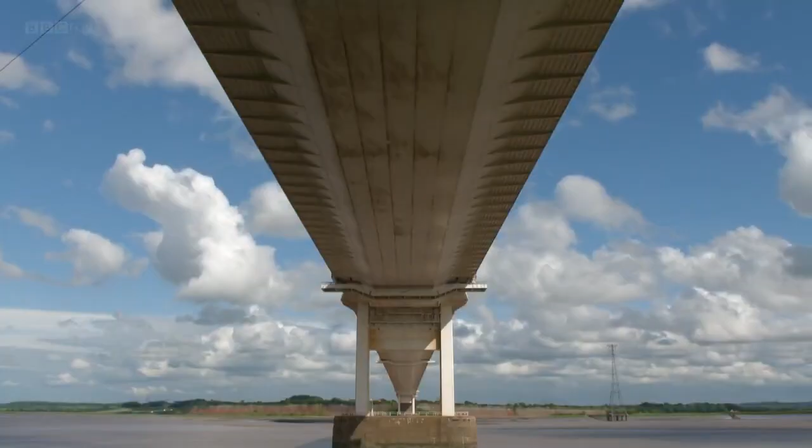The Severn Bridge is 50 years old, but its elegance is timeless, and its groundbreaking design continues to be flattered by imitation the world over. This, then, is the scene set for the royal opening of the Severn Bridge. It is with great pleasure that I now declare the Severn Bridge open.

The inauguration came 6 weeks after England had won the World Cup, and 6 months after the launch of colour television, a time of huge national optimism. What a day for a daydream. As Her Majesty comes, leading this great procession on to the Severn Bridge to make the first official crossing.

1966 was actually a pretty great year for British design, for British music, for British film, for British fashion, for British architecture, for British bridge design. Britain was on a roll. Bridges have this power to transform and excite a community and to make people really believe in the power of the future in a way, you know, that man's works can actually make life better.

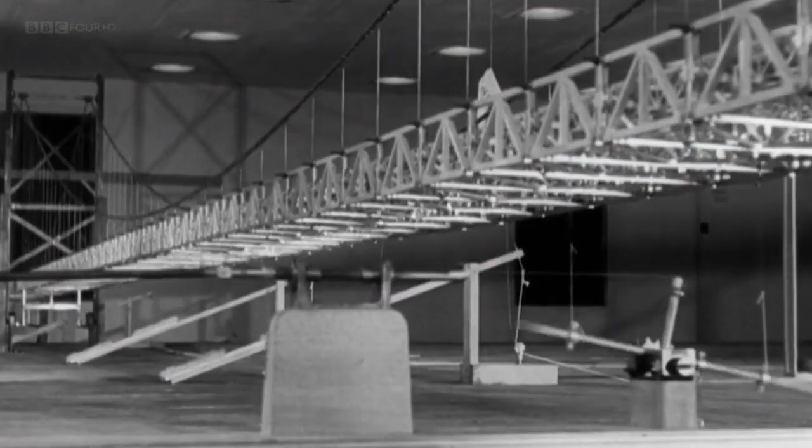This is the story of the Severn Bridge, told by those who designed it. Severn Bridge is the most perfect example of a suspension bridge in the world. It remains the leader of that sort of innovation. Nobody has found a way of doing it better. And those who built it. The workforce on that bridge, they were a breed of men on their own. The older I get, I'm very, very proud of the job and everything that went into the bridge.

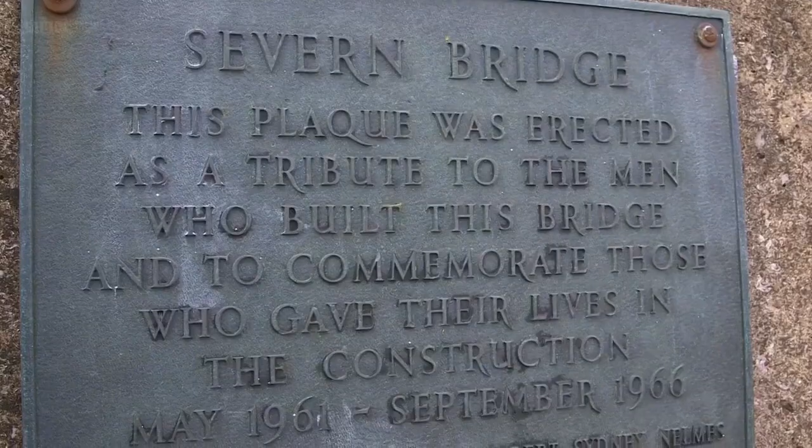But it's also the story of the men who lost their lives in the conquest of Britain's mightiest river. I always think of it as my father's bridge.

For many of its 200 miles, the River Severn shadows the border between England and Wales. But in its lower reaches, it presents a formidable barrier between the two countries, isolating the industrial powerhouse of South Wales. Once, if you wanted to drive between Cardiff and Bristol, you faced a 100-mile journey through Gloucester and Chepstow, their narrow roads increasingly overwhelmed by traffic. Or you could take a small ferry, but it ran only in daytime for a handful of cars.

The road links into South Wales from England were unbelievably awful. People cannot really envisage how it was. For instance, if you left South Wales and you went to the Beachley Aust ferry, which was the way to get over the estuary, and that ferry didn't always run because of the tide problems, and alongside the road down to the ferry were stakes in the ground which said half an hour, 1.5 hours, 2 hours. That's how long it would take you to get into the ferry.

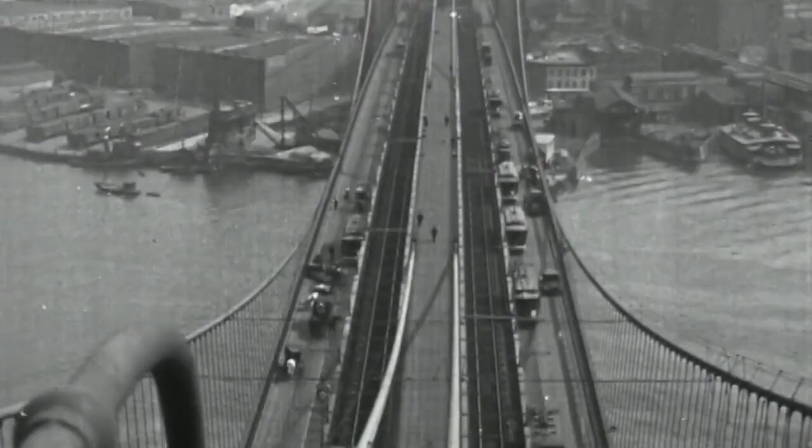I was born and brought up in Bristol, so from a very early age I used to go to the Clifton Suspension Bridge, which meant I was inspired with the whole idea of a bridge leaping from one side of a gorge to the other. The masters of long-span suspension bridges were the Americans, and they made them big. The Golden Gate and the bridges of New York were heavyweight structures with stone towers supporting iron and concrete roadways.

But when engineers tried to lighten the load, disaster struck. A terrifying example of the danger of vibration. The third longest suspension bridge in the world plunges to destruction at Tacoma in the United States.

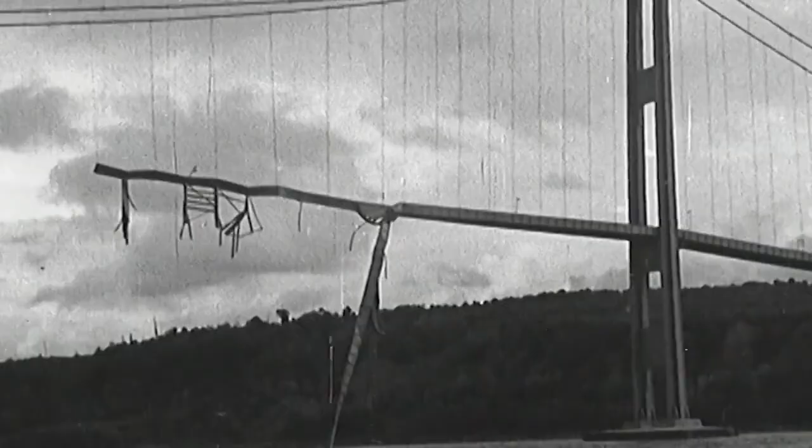This was quite a major bridge in the United States, and it was a radical departure from the conventional American design. But the fatal flaw with that design was that it had virtually no torsional stiffness. It was too flexible. It wobbled itself to death, basically, because there's inherent movement in structures. And the great trouble with suspension bridges is that the vibration set up by the wind can be like a sort of semi-perpetual state that increases and increases till the point where the bridge actually falls apart. These were big issues, but the Severn Bridge pioneered certain solutions to that.

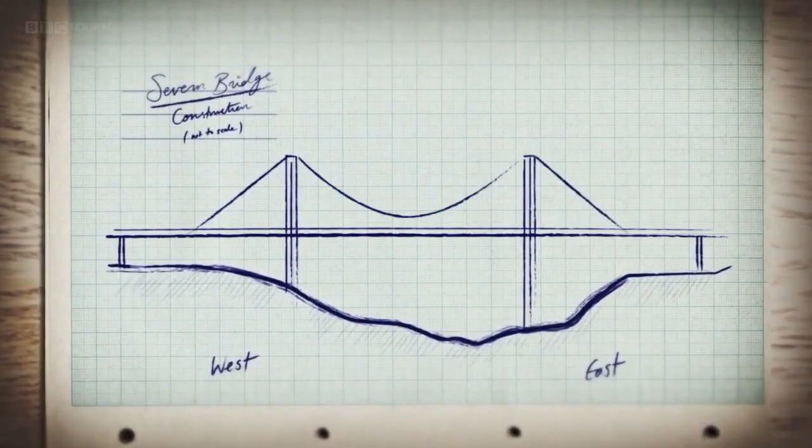Defying the wind was the greatest challenge, and ultimately the bridge's greatest claim to fame. A unique road design would hang from suspension cables draped over 450-foot steel towers. But before all that, the foundations had to be laid in a river infamous for the second highest tide in the world.

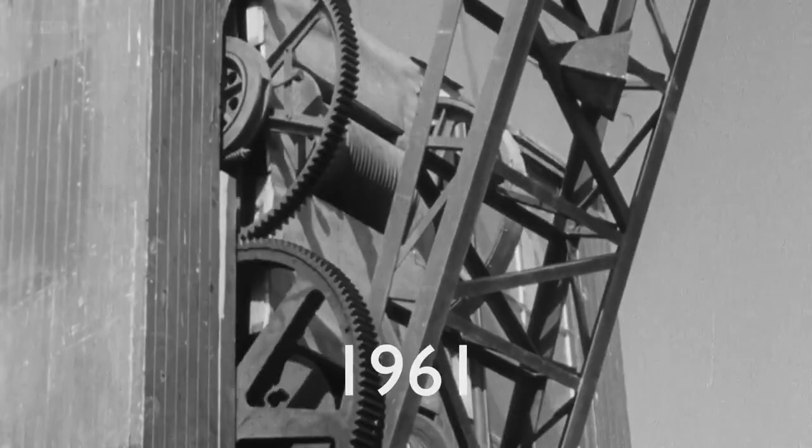Sir John, will you be faced with any particular difficulties bridging the Severn at this point? We will have to cope, of course, with an extremely high range of tide between high and low water, as much as 40 feet in this case. So we will be able to get to Wales in comfort by about 1965? So, yes. Thank you very much, Sir John. I'm talking to you from the middle of the M4, the London to South Wales motorway. Or at least it will be the middle of the M4 in 1966.

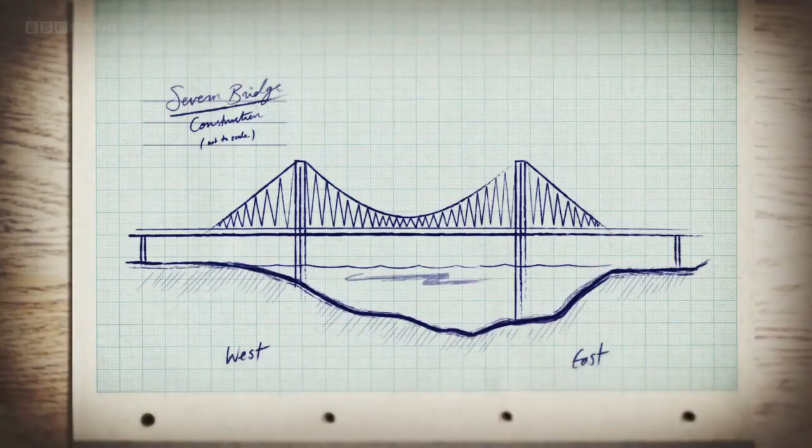The BBC reporter Tom Salmon documented the entire construction, beginning in May 1961. This, in fact, is the long-awaited Severn Bridge, the bridge they've been talking about building now for 100 years. The first 2 years would be all about the foundations. On either side, enormous anchorages would counter the weight of the bridge, and in the river itself, 2 bases would support the towers. The huge tides made this the most dangerous part of the entire project, especially for the foundation of the East Tower.

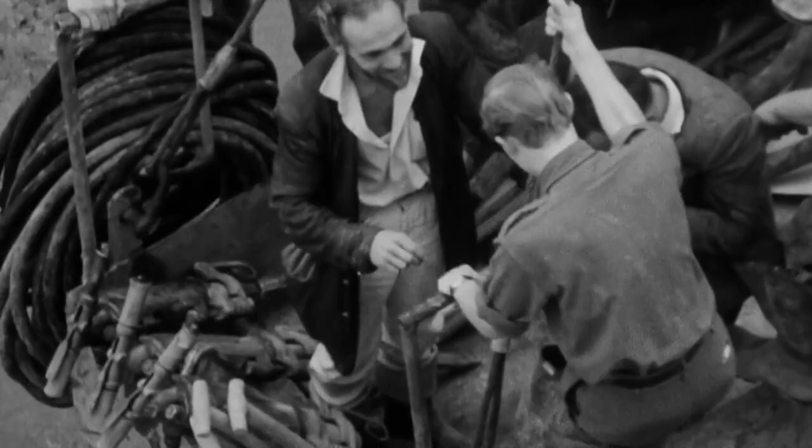I've heard a lot since I've been out here about tidal working. What in fact does tidal working mean? The tide goes out and the men go down on the blocks. The tide comes back, the men have to get off the blocks and wait for the next time. It's a dog rough job and there's not many men can stick it.

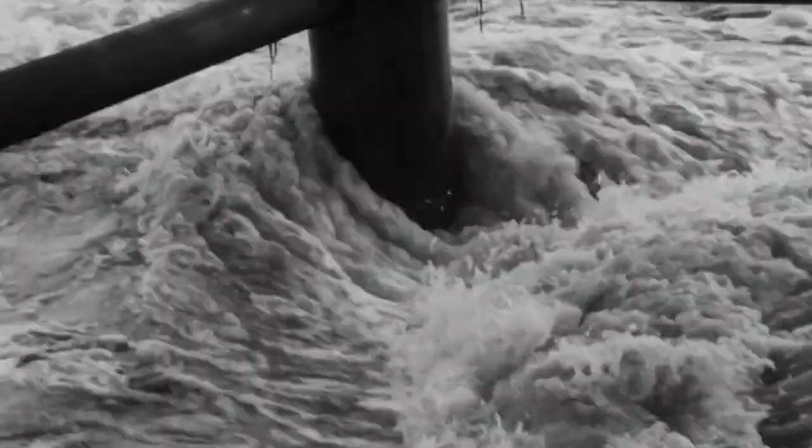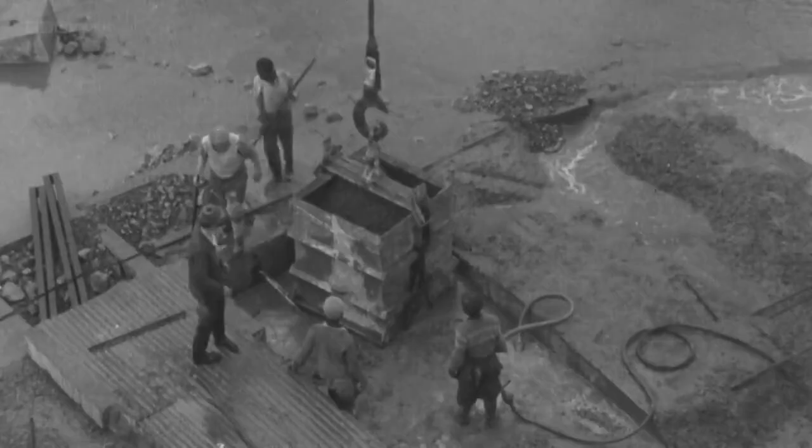This is a picture of me with our caisson sinking foreman. I had hair then. I'm John Evans. I was the most junior site engineer of the Severn Bridge. We were working in a regime where at an appointed time of day there was 40 plus feet of water. 6.5 hours later you were on exposed rock. 6.5 hours later there was another 40 feet of water. So working in this river with this huge rise and fall was a major civil engineering challenge.

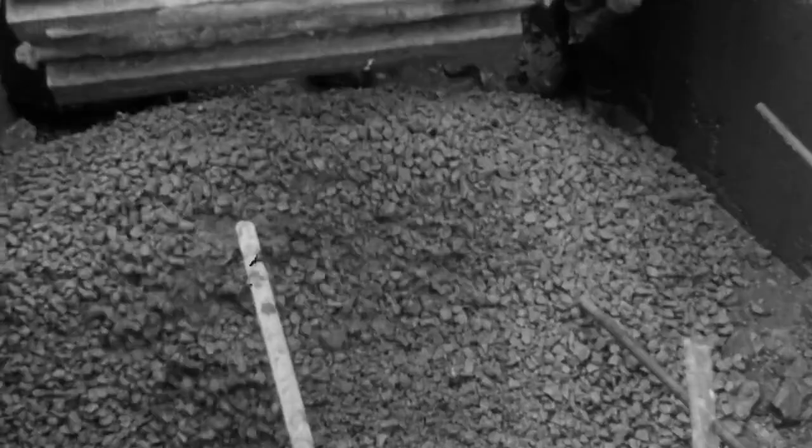The rock was probably exposed for a maximum of 2 hours at low water springs. So you could take a very small area, clean it off, and put a bit of concrete down. And then you come back 12 hours later and do another bit. And some of the lower parts of the rock were literally only exposed for about half an hour at low springs. I thought the men were brave because of the intimidation of that water coming in. I did feel, yes, a deep admiration for the foundation contractors.

Because of the tides, safety launches were on permanent standby throughout the construction. Their first one was skippered by a local fisherman, Jack Hollins. I think it's a family thing.

My father was in the shipyard. My Uncle Jack was a fisherman. He used to go out and fish for salmon. He worked on the ferry.

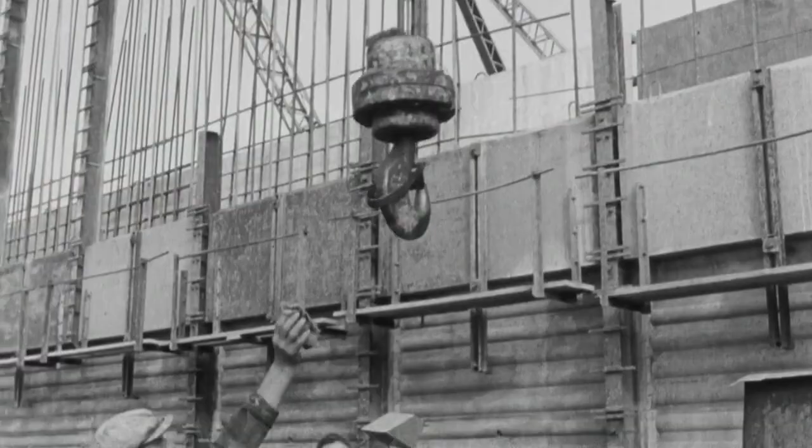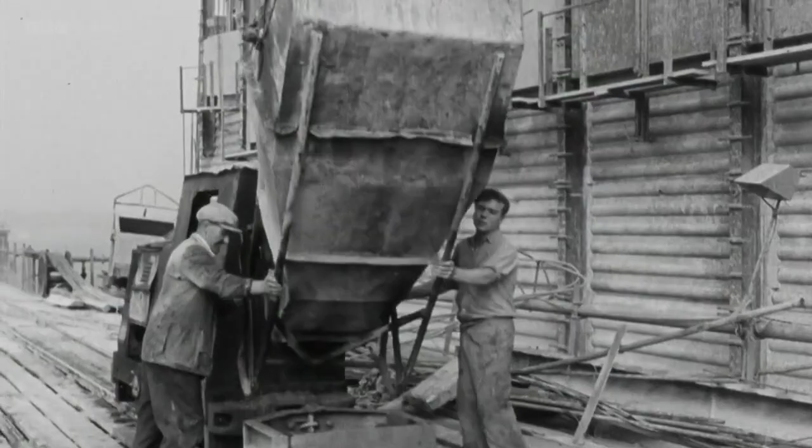This is the eastern anchorage, and this will take the whole weight of the Severn Bridge. And next time you complain about having to lay a concrete path in the garden, well, just you think of this little lot. It's 140 feet long, 110 feet wide, and 120 foot high. And into it, when it's finished, 90,000 tons of concrete, and 90,000 tons means that it'll weigh more than the Queen Mary. The concrete consumed vast quantities of stone, pushing nearby quarries to the limit.

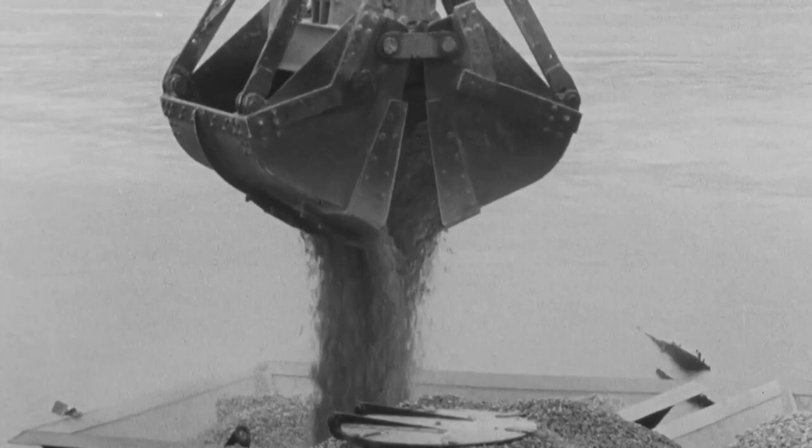The area's hotels were stretched to accommodate hundreds of workers coming in from across the country. But local people knew it would all help to relieve their biggest problem. Before the bridge, Chepstow was a real blockage. There was queues and queues and queues of people. They couldn't get through. Huge lorries, they would shake the house. Boom, boom. And we've even been reduced in very warm weather to go and take drinks outside. The lorry drivers. Take you home with me.

Get my house. There used to be queues every bloody day. Some days it'd take us about half a day to get to work. With traffic and Chepstow. Crashing, lorries crashing into shops and whatever. And it was a bottleneck. The famous arch in Chepstow used to be one big congestion. And when people drive into Chepstow, there's only one object at the moment, and that is to drive out of it if they can. I think once the bulk of the thundering lorries are out of the town, people will want to come to Chepstow.

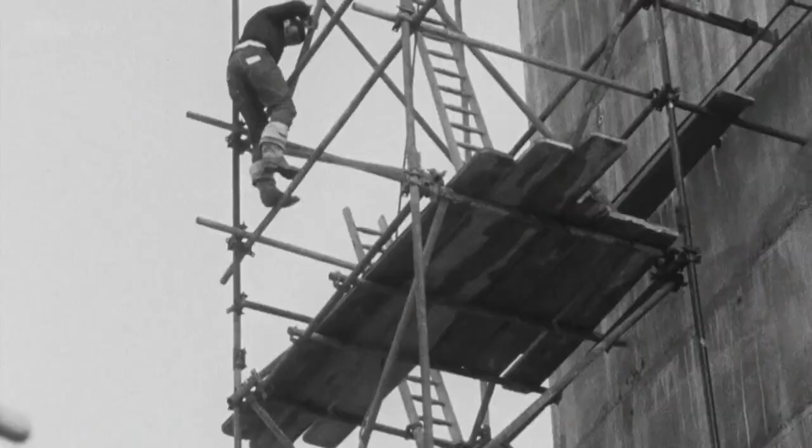Personally, I'd rather come down in the bucket. Well, so much then for the anchorage. 90,000 tons of it, 45,000 tons still to go. There's another one just like it on the other side of the river, and they tell me there's quite a bit of rivalry between the two.

We had to establish where the west anchorage was going to be. That was in the middle of the Army Apprentice College first rugby pitch. And one of the early jobs was to take up the turf and get rid of that. Lots of new lawns in Chepstow.

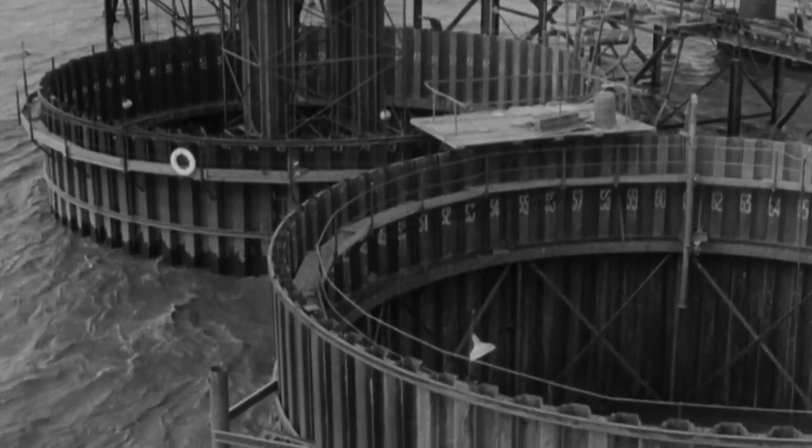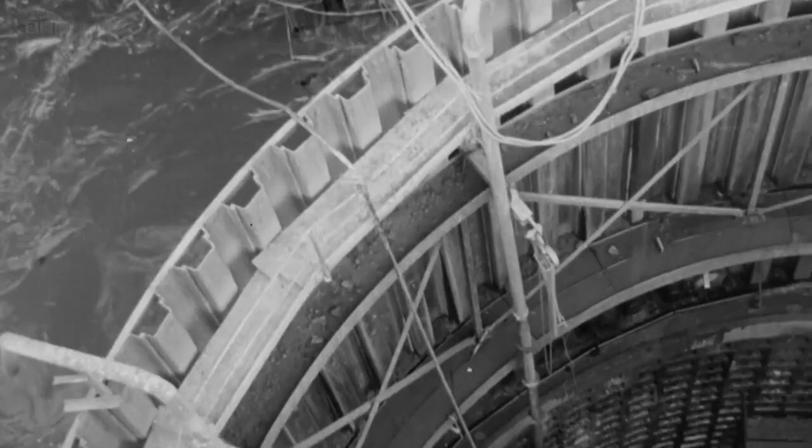Attention now switched to the base of the West Tower and a new problem. Here, there was no bedrock on the surface, so to gain a solid footing, they had to dig 30 feet below the river, and that meant installing temporary dams to stem the tide. The cofferdams themselves were in effect a vertical cylinder, 40 feet high, 60 feet wide, and they were formed of sheet piling. You see it on dock walls and places like that.

My name is Graham Nash. I arrived on the site of the Severn Bridge to supervise the construction as a junior engineer.

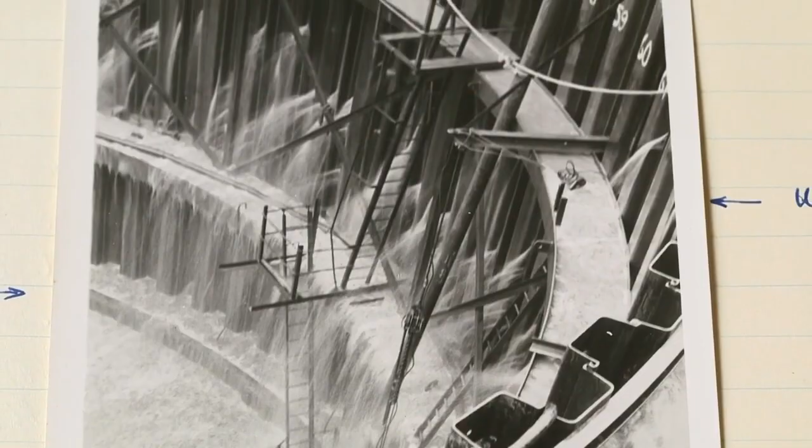This shows the water coming in through the joints. The cofferdam would only leak until eventually the tide dropped, and then it would leak the other way. The conventional method for sealing these leaking joints was to pour ashes down the outside, and it was quite fascinating the way in which the water jets just reduced away to nothing.

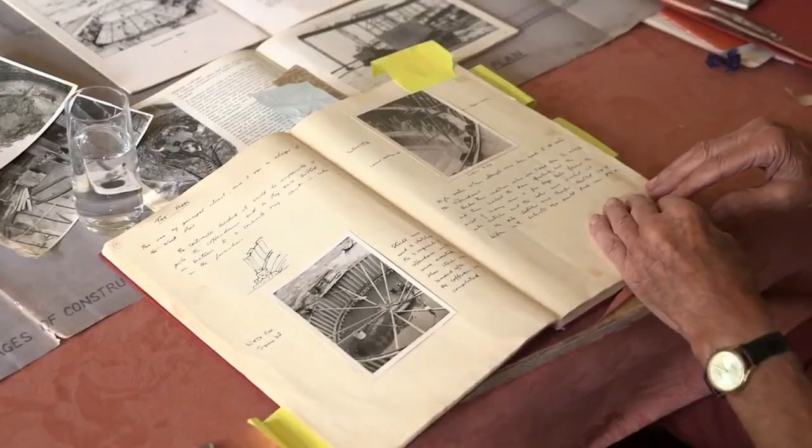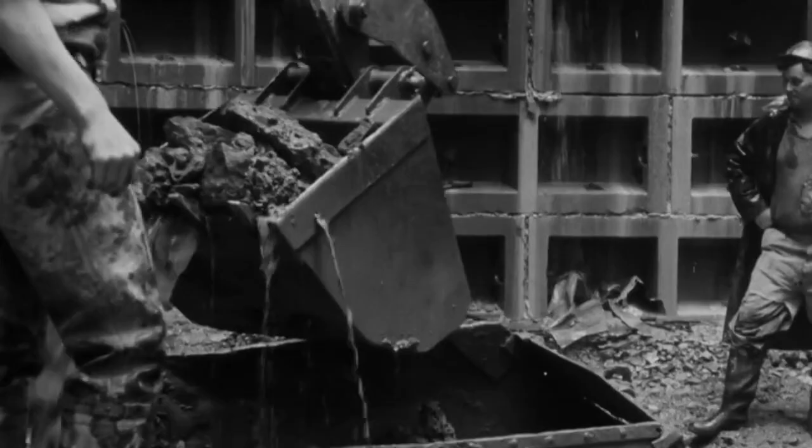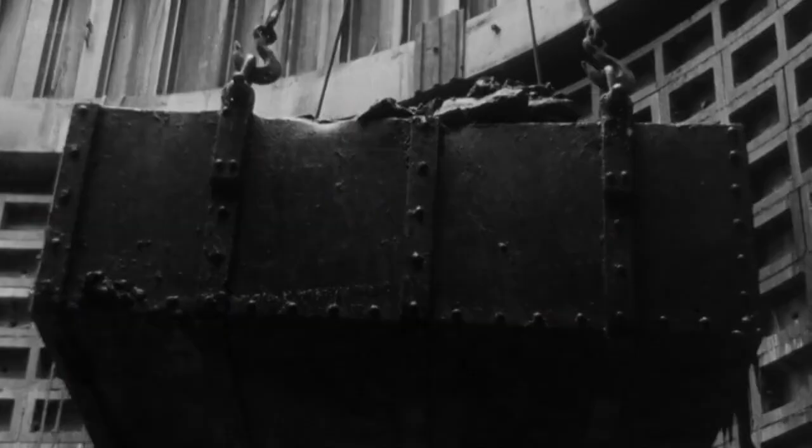So we had faith in the structure, and once you've got faith in the structure, you put on your wetsuit and your helmet and you go down there. We were working something like 60 or 70 feet below the tide level outside. And as a ferry went past at high water, you could hear the thump, thump, thump of the engines and the screws. And sometimes if the ferries came a little bit too close, you'd get an extra drenching down below.

It was an exciting job too. I mean, make no mistake, we knew we were building something quite historical.

The weather was also making history in 1962. The first inkling we had that we were in for something exceptional came the weekend after Christmas. We had the coldest spell of weather I can remember. Salt water in the river, and it became full of ice floes. If you were down at water level on the bank, it looked as though there were enough there to enable you to walk across. That was quite remarkable.

Before the first snow had even looked like melting, in fact, while most of it was still lying where it had fallen, there came another and even greater blizzard. Again, it was the southwest that bore the brunt. Throughout this period, we continued working, and towards the end of February and into March, the local quarries had to give up. The temperatures were so low that the crusher jaws, which are cast iron material, were shattering in the cold. Motorists were advised to take no journeys whatsoever, not even essential ones. 1962 went out with the southern half of Britain littered with abandoned cars.

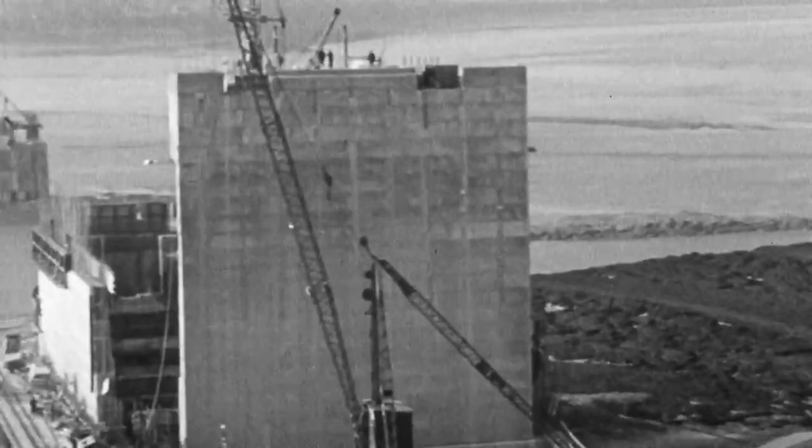Slowly, almost imperceptibly, the 6th biggest bridge in the world takes shape. Despite the setbacks, the foundations were completed on schedule. The anchorages on each side and the bases in the river ready for the towers. It was time for the concrete mixers to give way to the steel erectors.

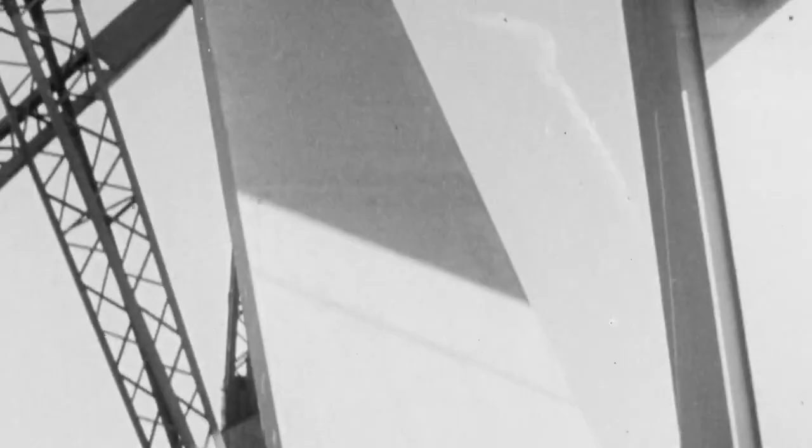It wasn't exactly exciting doing the foundations, really. It was interesting, but it seemed to be slow. You know, it took 2 years to get that pier constructed. But once we started to erect the towers, I think then it began to strike home that we were really going up. A lot of people think that the towers of the bridge are made of concrete, but in fact they consist of steel boxes bolted one on top of the other.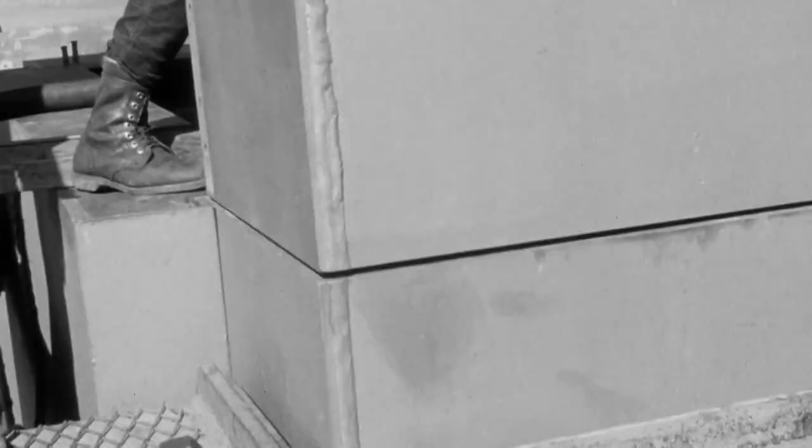When you build a suspension bridge, because of the curvature of the earth, if each tower is vertical, they're actually not parallel to one another because of the centre of the earth down here. And believe it or not, that is allowed for. If you want to get an idea of the precision of the job, just consider. When the towers were completed, they were strained outwards exactly 32 inches. When the centre span is completed, they will lean inwards exactly 8 inches. And when the side spans are added, the towers end up vertical. Isn't that miraculous?

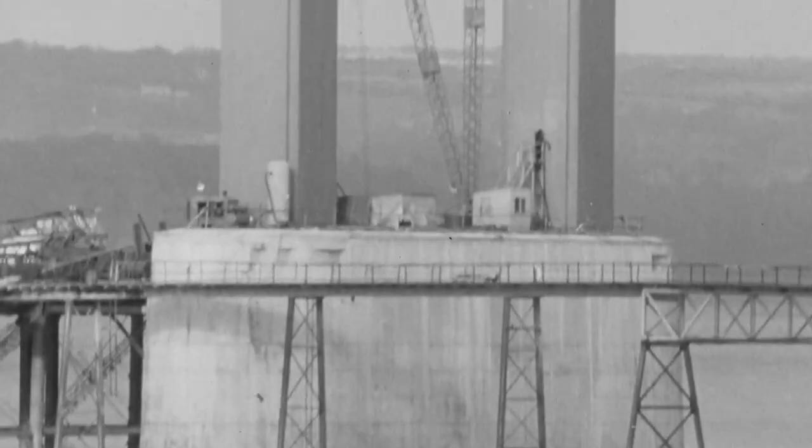And on they went. 2 towers, 1,200 tons each, erected in 8 months. The next thing they had to do was to join the towers together. They had to get a piece of wire across 3,000 feet of water. Well, this they did quite simply by loading a huge reel of wire onto a barge and driving it across and paying out the wire as they went and letting it rest on the river bed.

The demand for wire was insatiable, the length almost enough to encircle the planet. I'm Howard Peterson, and I left my father's farm and went to work in the winding shed. I've never seen anything like it before. The machinery and the coils are starting to come in, and what the devil do I do with this lot? They would come in on lorry loads.

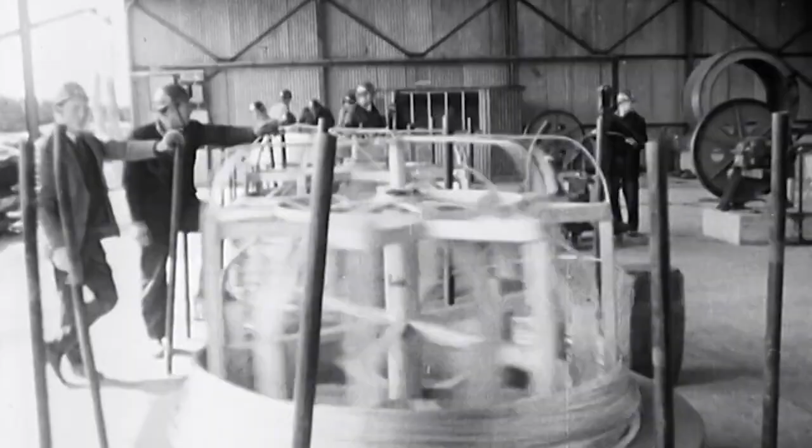You cut the bands on these coils and it could fly anywhere if you don't have it under control, and then reel it onto the main drum, which was like a giant cotton reel. The big drum was offloaded and taken away ready for spinning across the bridge.

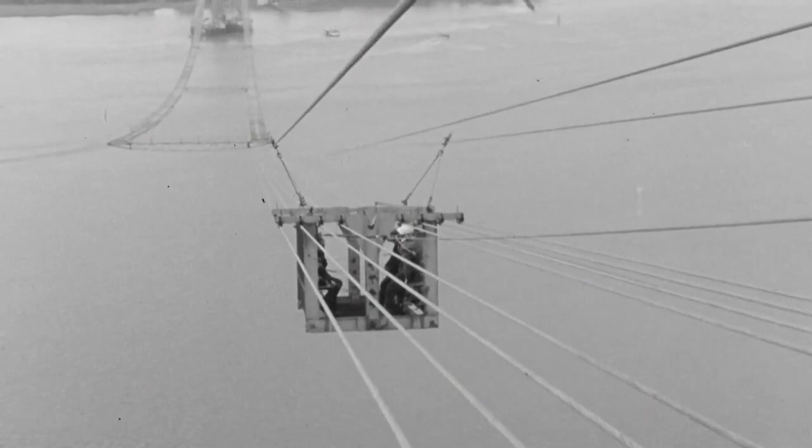And the foreman came to me one day and said, "I've got another job for you. I want you to go and be labourer to the carpenter." I just don't know what to do with myself. That was the first time I'd been up the tower. They then put square pieces of steel mesh to make footwalks from one side to the other.

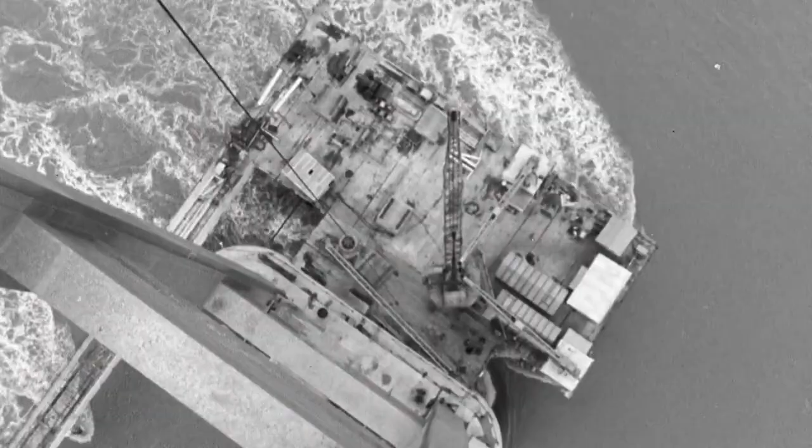To look around and see for miles, and then you think, God, I'm about 450 foot up. Never been up this high before, you know. And I looked over the side then, and had a look down and see the safety launch below. And it was like dots down below. It was unbelievable. So you go to the handrail.

One time the handrail wasn't there. It would have been open. Men were working on the top of this structure, and they had to work right on the edge of the structure to put the handrails around. You can't envisage being in that situation.

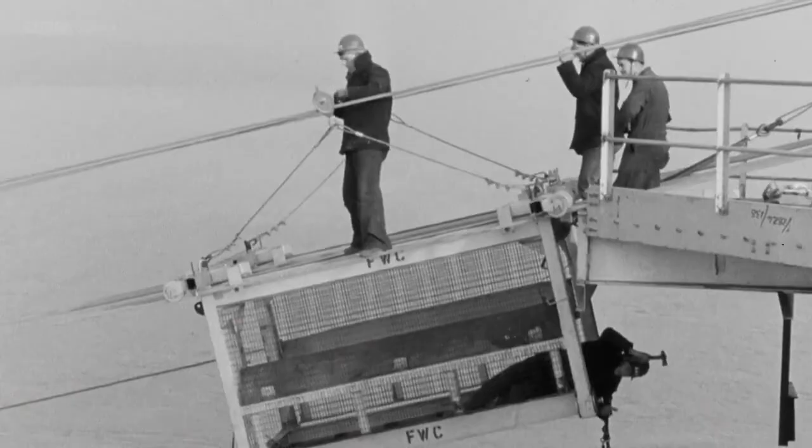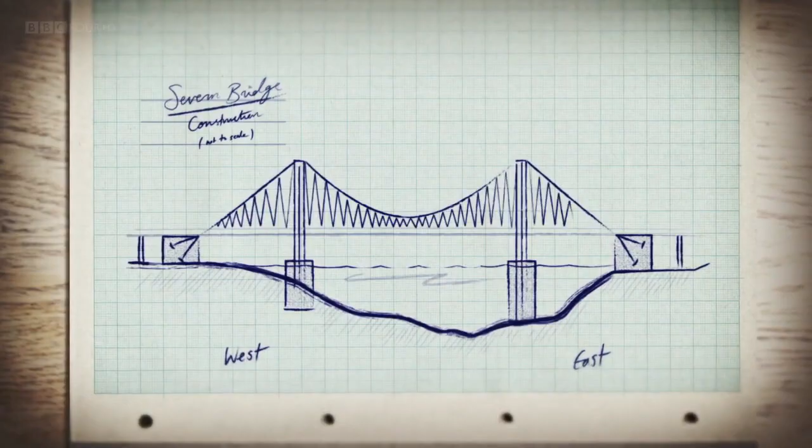The first wires were there simply to support the catwalks, but now it was time for the main cables from which the road deck would hang, and they were a different matter altogether. And I think this is just about the finest argument I've ever heard for giving up smoking.

And this is one of the main cables of the bridge, looking rather more substantial up here than it does from down below. And this, I suppose, to the layman is just about the most baffling bit there is of bridge building. How do they get a cable as massive as this one across the river?

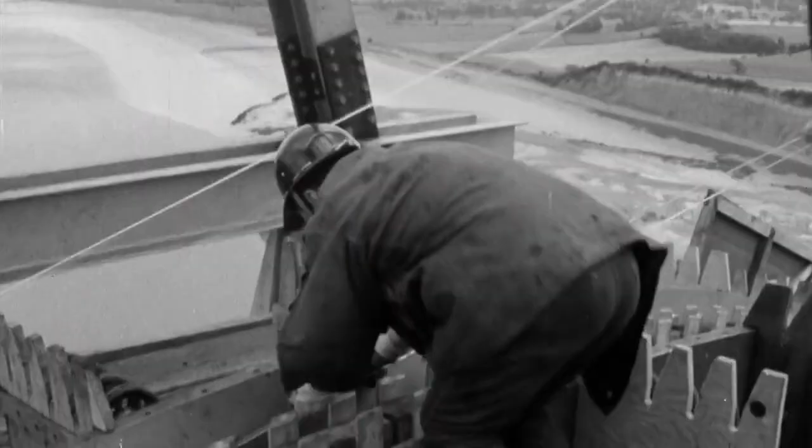Okay, now. It's a process whereby you pull a loop of this up over the towers, across the main span, up over the other tower, and down to the far anchorage. And then the carrying device comes back with a loop of wire again, and it goes back and forth, back and forth.

Cable spinning, as it was known, was relentless. 16 hours a day for 6 months until 18,000 miles of wire had been spun across the river. All right, Rob, settle it up. And for the whole 6 months, only strong winds gave the steel erectors any respite. Food and drink was brought to them on the catwalks as the spinning went on.

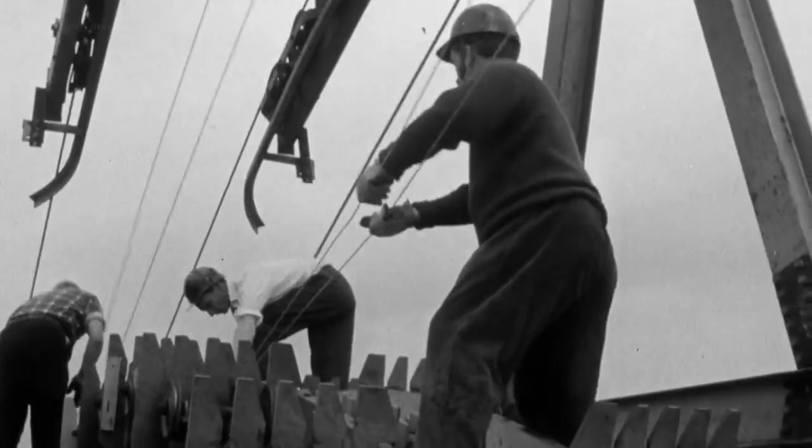I'm Brian Hughes, and I worked on the Severn Bridge, supplying the men that were spinning the cable with tea and soup. My job actually was delivering the tea down to the men on the catwalk. It takes about half hour to walk down there and back, with the tea on the back of it. But it was all right.

God. Everything a steel erector wanted, he had to have. And when the steel erector was unhappy, he'd be for the high jump. Our tea room was bolted to the side of the tower, and you'd enter through the roof, go down the ladders, just like you went into a submarine.

And the towers was moving easy, a good 4-8 foot from side to side. When you were in that canteen down the side of the tower, you put a cup on the end of the table, it moved from one side back to the other. Even a full cup of tea, man. When the weather was bad and the guys had to come in, I suppose they wore out more packs of cards than any other industry I know.

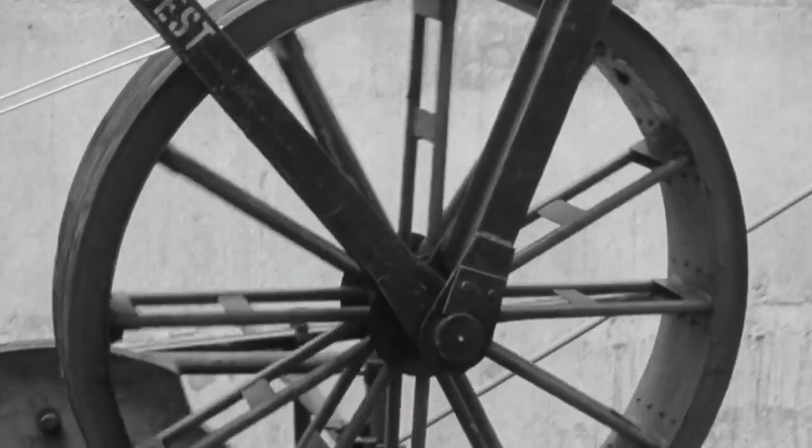The sound of the pulleys pulling the wires across was very distinctive. It was a sort of tinkling, clanking noise, and you could hear this going on from early in the morning until late in the evening.

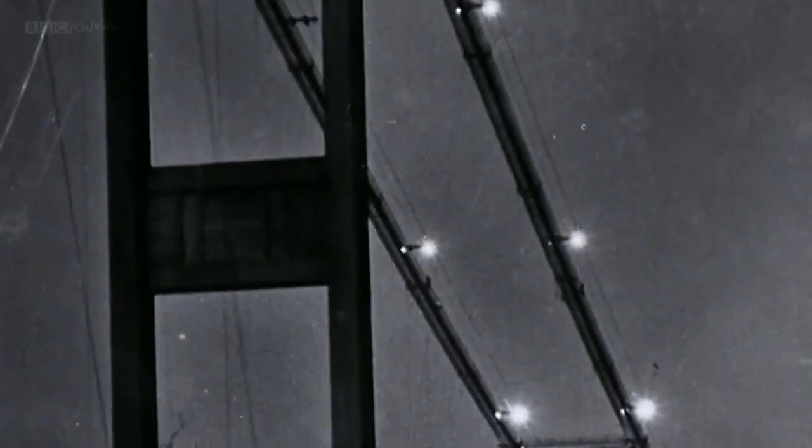Spinning continued day and night through the summer of 1964. It became a way of life. The team were very keen on skittles, and we became interested in the possibility of competing with some teams from Chepstow. Once or twice we drove round the top and down to Chepstow, and that meant a very late return home at the end of the evening.

And then someone said, well, why don't we walk across? The lights are always on, they're always safe. And so we used to walk across and have our skittles and then have a beer and walk back again. It was a very good way of spending an evening.

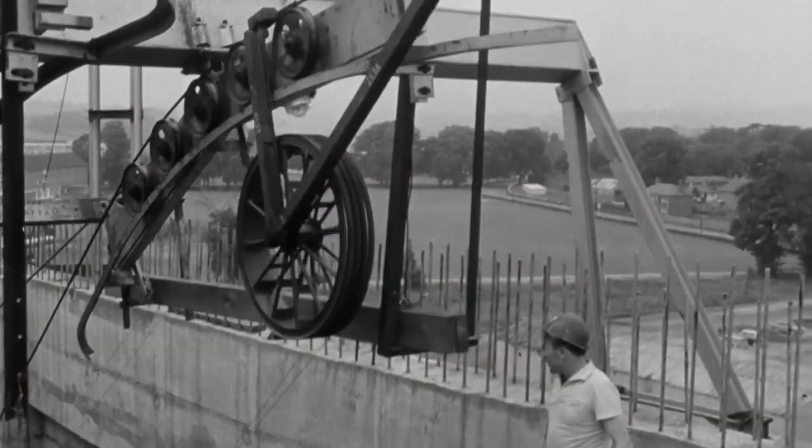On the deck, on the top of the towers, there was a portable loos. We had a guy there that looked after the loos. And he stunk that much, we wouldn't let him in our tea hut, so we used to bolt the hatch down. And I don't know what possessed the man. He came to empty the toilets and threw the bucket of waste over the side and didn't even look to see where it was going to land.

And unfortunately, the safety launch. Beautiful day, sun was shining, and we heard a splitter splatter which sounded like heavy rain. I went out of the wheelhouse and found that somebody had tipped the contents of the chemical toilet, and most of it had landed on us. The gaffer came rearing in to the tea hut and gave us boys a real dressing down about throwing the bucket waste over the side of the bridge.

I said, well, it wasn't us, you better go and examine what the contents are, and you could see it wasn't our fault. And one of the steel erectors slapped me on the shoulder and said, it must be your lucky day, what are you backing on the horses?

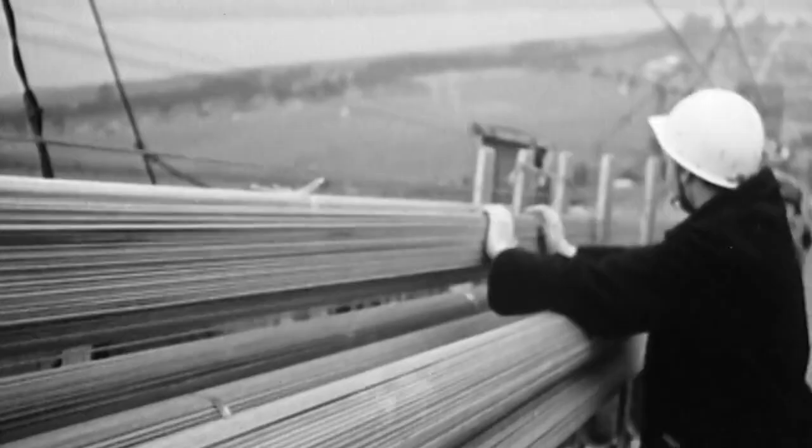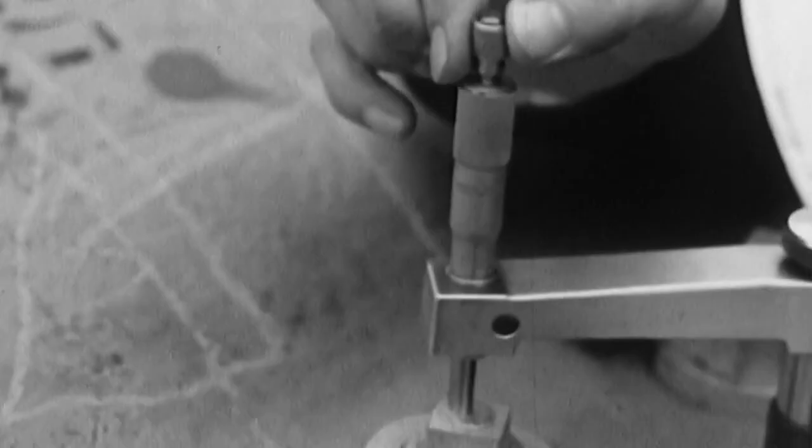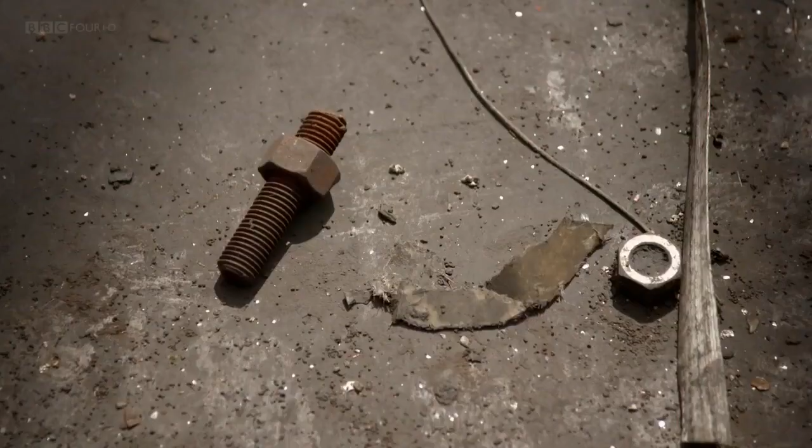Once all the wires are in position, they are compressed into a circle and clamped together at a controlled tension. Each cable is now ready to take a load of 10,000 tons, and the equation is almost complete. The final stage of construction was where the Severn Bridge achieved its greatest innovation. Today, the old shipyard in Chepstow shows little sign of its groundbreaking role in civil engineering history. But this was where they built the bridge's revolutionary roadway.

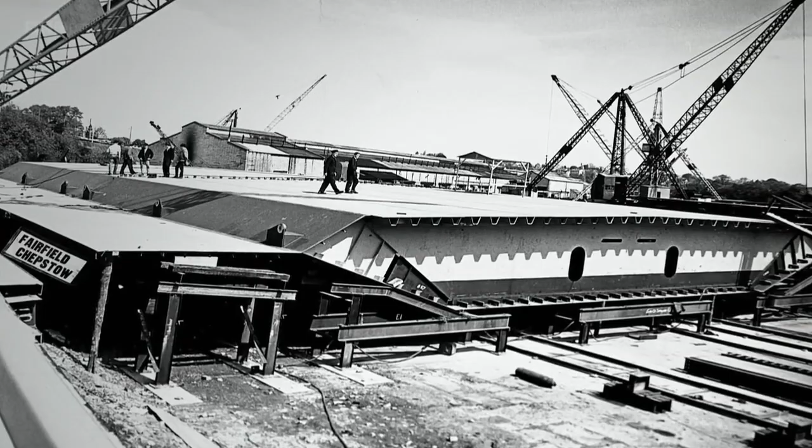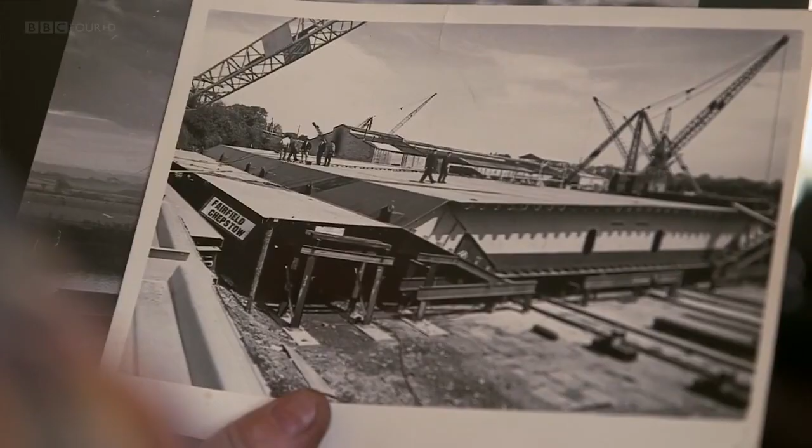This is the first time a box structure had been made of this shape or this size. It was built from stiffened plates, 1, 2, 3, 4, 5, and we all knew this was an innovation. And I think we all wanted to make a success of it. Well, I could describe it as a spaceship. The wind coming up the river, they were designed for it to go underneath and up and over. So it was an aeroplane shape, really.

But you know, I do believe I'm there. Looks like we're discussing whether it's time to go for lunch.

The plated box design was a response to the Tacoma disaster in 1940, but it took 20 years for the idea to gain favour. Those winds had sent shockwaves through the world of civil engineering. Fortunately, the only casualties were a car stalled on the bridge and a dog. As a result of the failure, we in this country decided that we would have to stick to the open truss, as in all previous American big bridges.

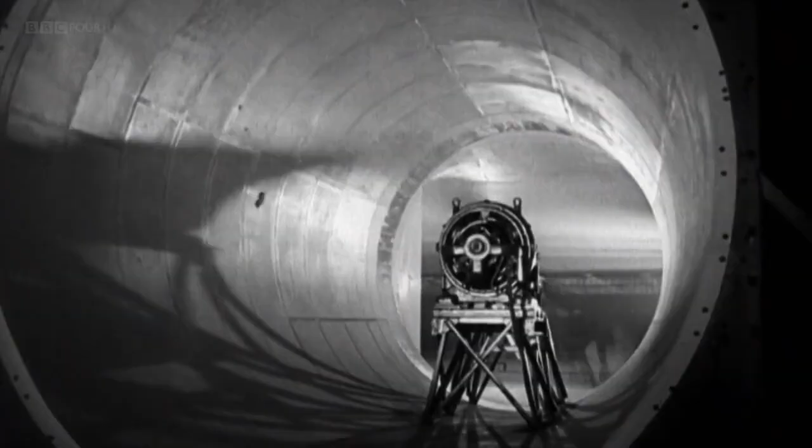The classic American truss deck comprised a heavyweight lattice of steel girders under a concrete roadway. And right up to the start of the Severn Bridge construction, this was the plan that was being fine-tuned in the wind tunnel. But the design team, led by a taciturn Welshman called Gilbert Roberts, already had the plated box in mind. They just hadn't had the time or opportunity to test it.

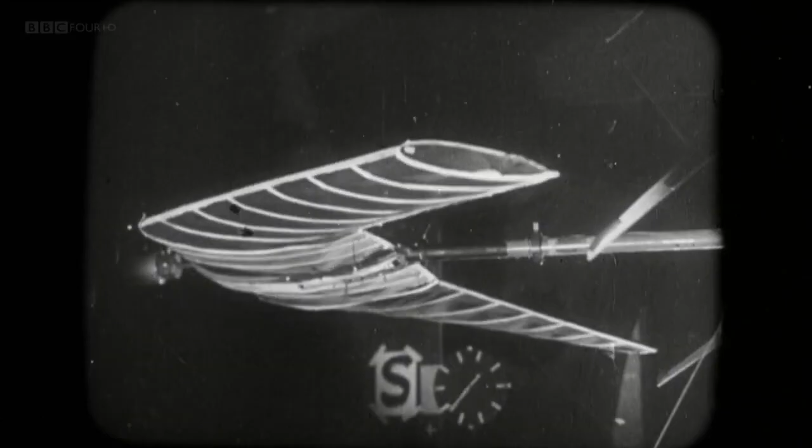A very good solution had been found to the problem of Tacoma Narrows by making it with open work trusses. As the wind stream meets the front girder, it divides and curls round the top and bottom edges of the girder. But this had the cost of considerably increasing the actual ordinary wind forces. And the way to get around that would be to make them much more like an aircraft wing. And Gilbert Roberts wanted to test the new aerofoil type there. But this was unprecedented, and wind tunnel testing time is scarce and expensive.

And then one day, Gilbert came over into the office and said the model that they were testing in the wind tunnel has broken loose from its anchorages and has smashed itself. The man responsible was seriously worried, thought that Roberts would be highly critical. I'm dreadfully sorry, Mr. Roberts, but we've just broken the model. And it wasn't in Roberts' nature to say, hooray! But that was his reaction, in fact.

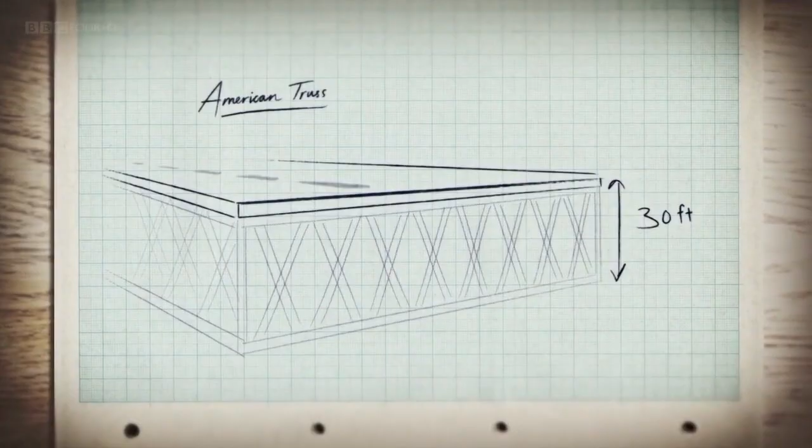So I said, well, the time has come, I think, sir. He was sir to me. I think the time has come, sir, that we've got to think about the possibility of using the plated box. So out went the heavyweight truss, and in came the plated box, a third of the depth and half the weight.

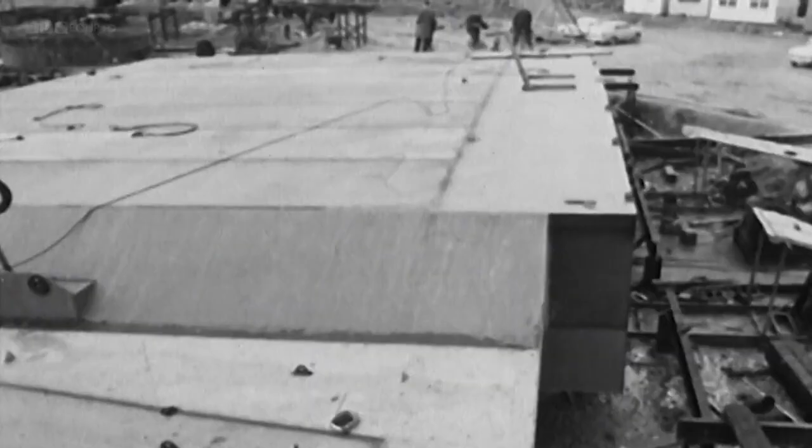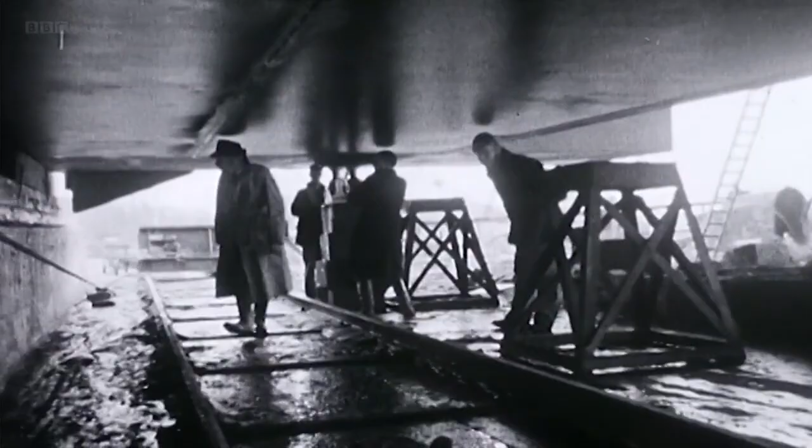It sailed through its tests and went quickly into construction. A stroke of genius with a touch of serendipity. It was streamlined, which meant that the wind forces were less. It used less steel, and therefore it weighed less. And therefore you reduced both the lateral forces and the vertical forces.

So there were savings on the cables, on the towers, and on the anchorages, because the tension of the cables was less. And if you add all those savings together, it is immense. One of the towers of one of the big American bridges contained more steel than the whole of the Severn Bridge.

And you know, I think when this was pointed out to the American engineers, they got a bit annoyed, really, and thought that we'd been cheated. The Americans might have envied another benefit of the boxes, that they could float and therefore be towed down to the bridge. The first of 88 that would span the Severn was launched in September 1964.

All the dignitaries were watching and all ready on the sides, and he had to give it a blow with a hammer, and the pin flew up, hit the hammer with his hand up in the air, caused quite a lot of amusement. But slowly the unit started up and slowly launched itself into the river. No problems, all perfect. Much to our delight and relief.

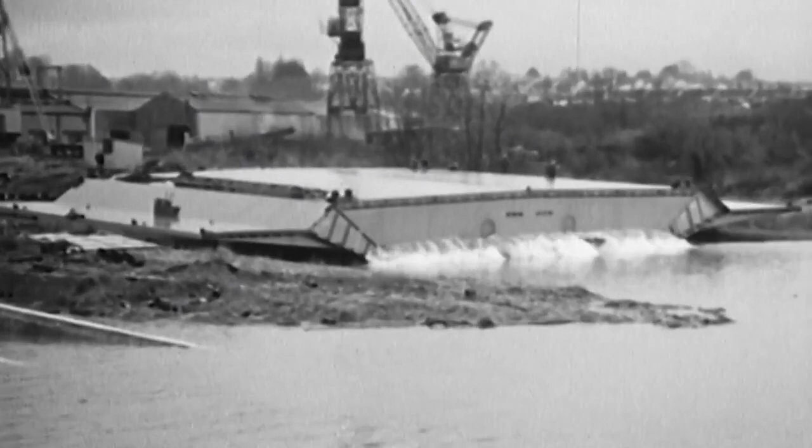Slender, streamlined, almost fragile-looking, their appearance conceals a strength and solidity which will allow winds of 100 miles per hour to blow harmlessly round them. The road sections of the bridge are made of steel. In fact, they really are just a series of steel boxes which have been made up in the steel yard at Chepstow and then launched into the River Wye down a slipway.

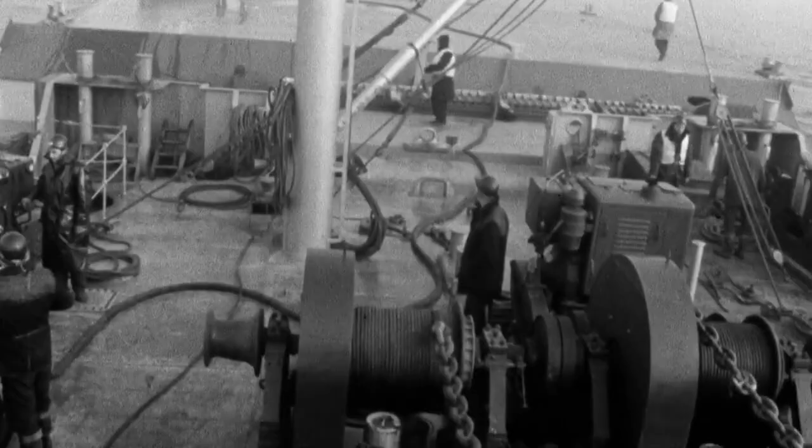A special barge was built to collect the boxes and take them to the bridge. Called the Severn Nave, it had no rudder and was steered by 4 outboard engines, one on each corner. My name's John Roberts. I was a deckhand on the Severn Nave in 1964. Just waiting for the sections to come into the water, and then we'd get hold of it and secure it. It was a very nice job to work on. We used to look at each other and say, they pay us for this.

The skipper of the Severn Nave was Jack Hollins, the man who'd survived the fatal accident on the first safety launch in 1961. Now his knowledge of the river would prove invaluable. Jack had always worked on the river. He was a fisherman, operated one of the stopping boats in the Wye. Very skillful. He was just always in control. He used to see things

before they happened. Jack was tall, dark and handsome, and he was always part of our lives as children. And we used to go and stand at the end of Raglan Way, and we could look down on the Wye River, and it was something to see. It was really like looking at a submarine, actually, a very large, wide submarine. The main part of the road decking, as they call it, is 80 feet wide, and there'll be 4 traffic lanes, 12 feet wide, 2 in each direction.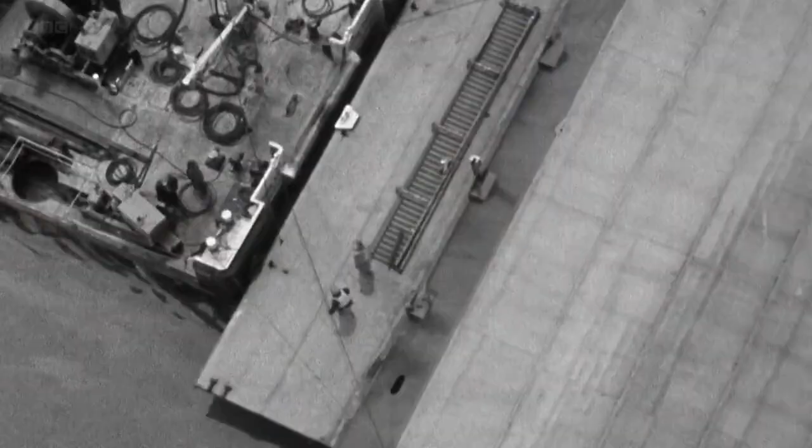So Jack had to manoeuvre this vessel into position underneath the lifting tackle, and it would have been a fairly tricky job to do. We get the sections, bring them out into the Severn, drop anchor 50 yards, 100 yards before the bridge, and then you let it out on the winch and just drop it down under the bridge. You've got to have good visibility. You've got to have wind less than 30 knots, and preferably no snow and ice.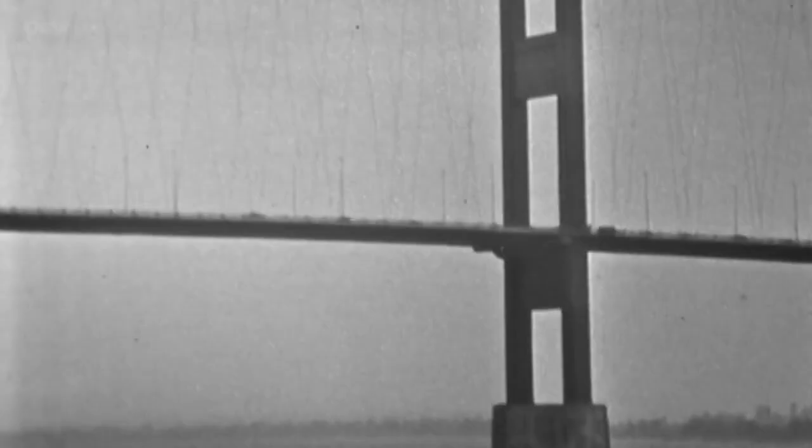The breakage of the model was completely crucial. It opened the door to testing the new scheme, and the new scheme at that time was completely innovative for long-span bridges. And later, she's to see the Concorde, now building at the BAC's Filton factory. So quite a day this for British engineering.

I think as a nation at that time, we did feel supremely confident. I personally felt I could do anything. I know it's ridiculous, really. Everybody felt confident for the future.

The idea of a bridge to span the Severn has been a vision for many years, and as an advertisement for the ability of British engineers and constructors, and shows just what can be achieved. It is with great pleasure that I now declare the Severn Bridge open.

The bridge was considered so special that an orchestral piece was commissioned for the occasion. It was commissioned actually by none other than the BBC. It was a work called Severn Bridge Variations, written in 6 connecting parts by 3 Welsh and 3 English composers. The French had done this quite a bit over the years, celebrating engineering structures with modern music. The British came in, this Anglo-Welsh venture, rather beautiful.

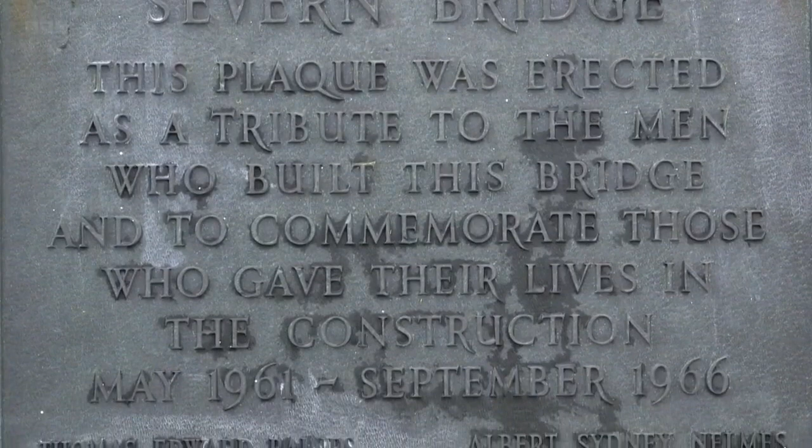A year after the royal opening, a second plaque was unveiled to commemorate the 6 men who lost their lives in the construction of the Severn Bridge. Remarkably few, perhaps, for such a perilous project. In 50 years, many more of the 400 who built the bridge have passed away. But those that remain preserve their memories with great pride. At the end of the day, we had a party, and we all got very merry, and that was it.

Some years after I finished on the ferry, I thought, well, I'll paint a picture of the last day. And I just sat down and painted this. I like Raoul Dufy, and I try to paint like him, but his paintings look very easy to do. But no, it's not easy. No, it wasn't easy to do. But I just painted it. And there it is.

I've got shallots in the corner now, waiting when they grow up. They'll be pickled onions for pickling. Broad beans, leeks, and this is the walkway from the Severn Bridge. Oh, and by the way, I've forgotten to mention my rhubarb. You can see how strong, you can put all the pressure on it. And it's perfect, not having to rust after 50 years.

I think the bridge today looks just as fine as what it was when it was first built. I can remember coming back from holiday and looking down the plain, and you could see the bridge. Absolutely perfect. That made me feel proud. I'm glad we landed.

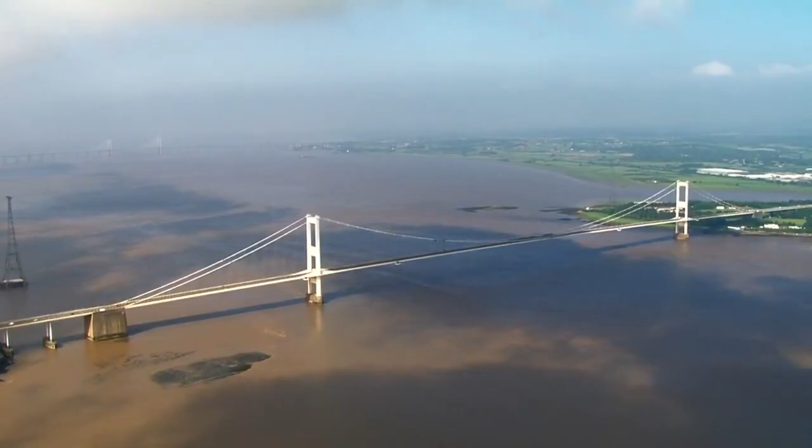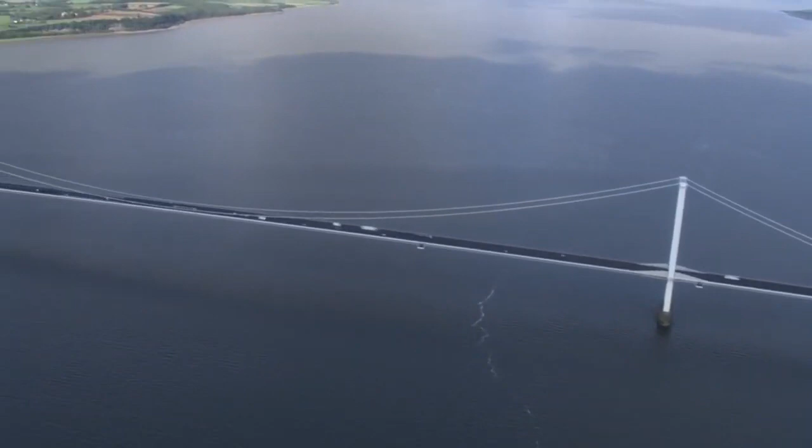It looks right to people who don't know anything about engineering. They can see how it works. It's like hanging washing on the line. You know, you can see how the washing is supported by the thin wire. But it is a fact that if it looks right, it's a good indication that maybe you have got it right. So right that the Severn Bridge design has been adopted by every subsequent long-span suspension bridge.

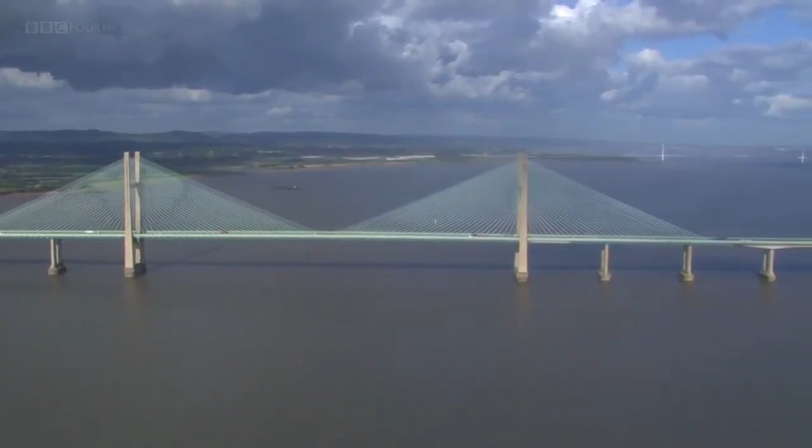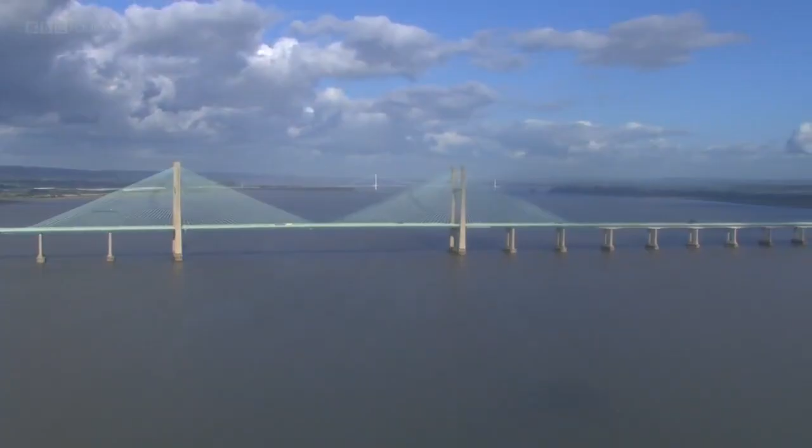20 years ago, the second Severn crossing created a more direct route for the M4 and prompted questions about the future of the old bridge that continue to this day. But for the men who built it, there'll only ever be one way. It remains the leader of that sort of innovation. Nobody has found a way of doing it better. And I always use the old Severn Bridge whenever I have occasion to go to South Wales.